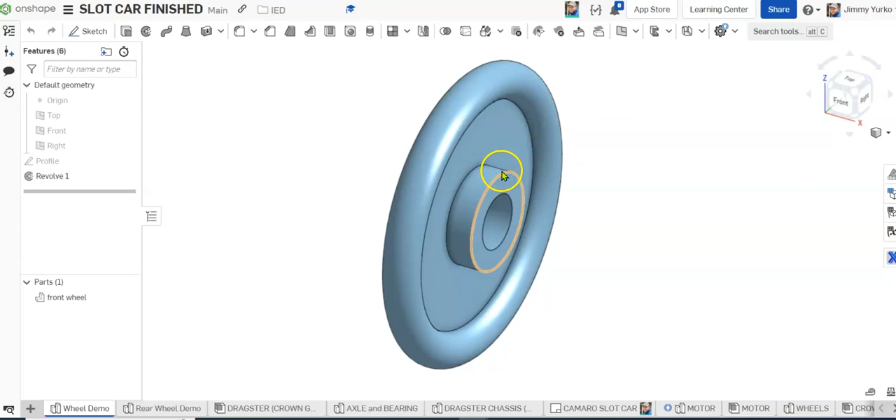Well, ladies and gentlemen, today we're going to go ahead and make this wheel for the slot car project. The drawings provided show you the details needed to create this wheel.

When you take a look at this, the first thing we're going to notice is that it is round. When you are creating round objects, they can be revolved. So this is going to actually be a revolved profile.

You typically would look at this and see these diameters and think, oh, I can extrude those. In reality, the quickest and easiest way to make this is the same way you would make it on a lathe, and that is to cut a profile and sweep it around an axis.

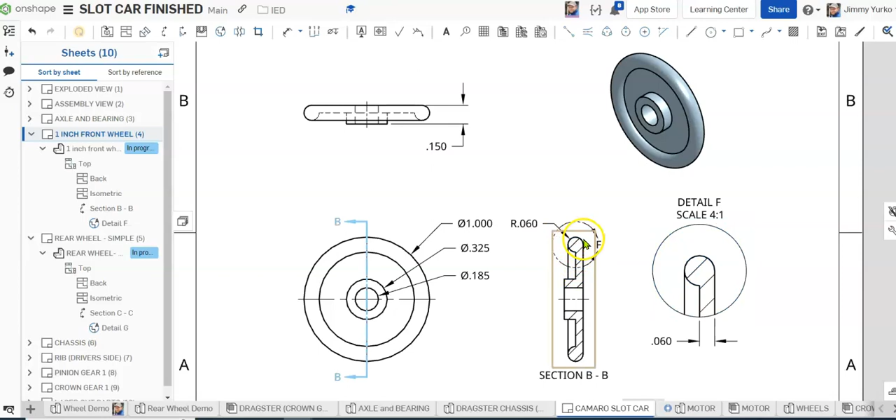So this center line is going to serve as our axis that we're going to revolve around, and this crosshatch shaded area right here will be the profile that we're actually going to draw.

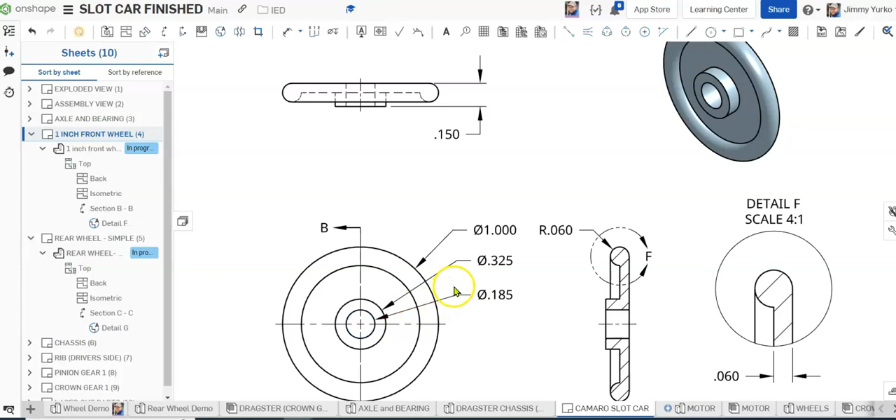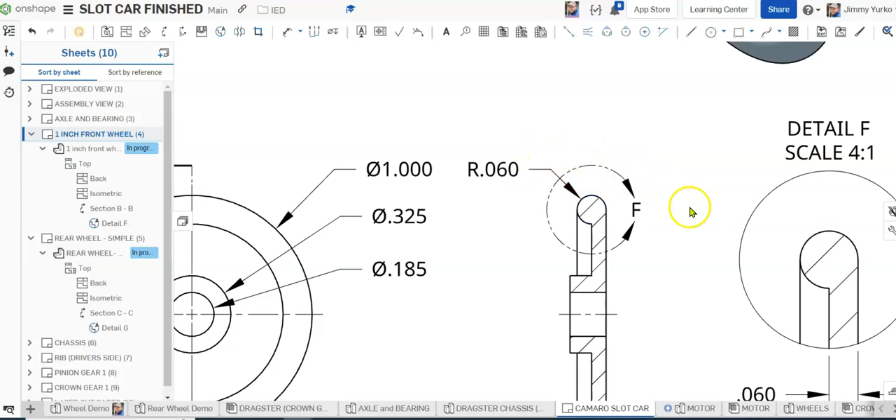A couple important details: you notice our dimensions are provided as the diameters for the object. But of course, when we draw this, we're going to be drawing half. So we're going to need to divide all these measurements by 2 for the diameters, because we'll be needing radii. The radius for the fillet for this circle is provided, so we don't need to do any math there. And the thickness for the back of the wheel is provided here in the detail view.

So looking at our drawings, just a quick review: here's the finished product isometrically, here's what it would look like when you're looking at it straight on from the side or front view, here's what you would see when looking at it from above, and this is a cutaway section view.

So you can see that when I hover over this, the line B to B, with the arrows on the left-hand side, is highlighted. That's the B line with the 2 arrowheads, and that is a cutting plane. So if we were to slice it along there and then stand here looking to our left, this is what we would see. All right, let's roll it over to the Part Studio, and this is the part we're going to make.

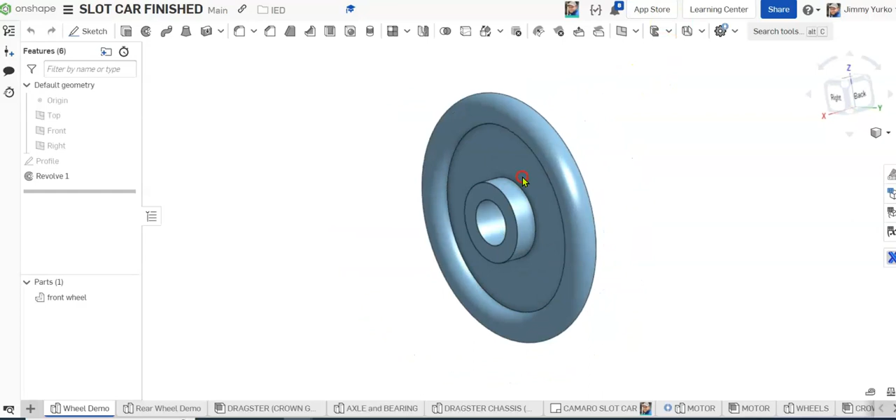Going into our profile, this is what we're going to finish with when we're all said and done. So for this demo, I will just draw another one right next to it.

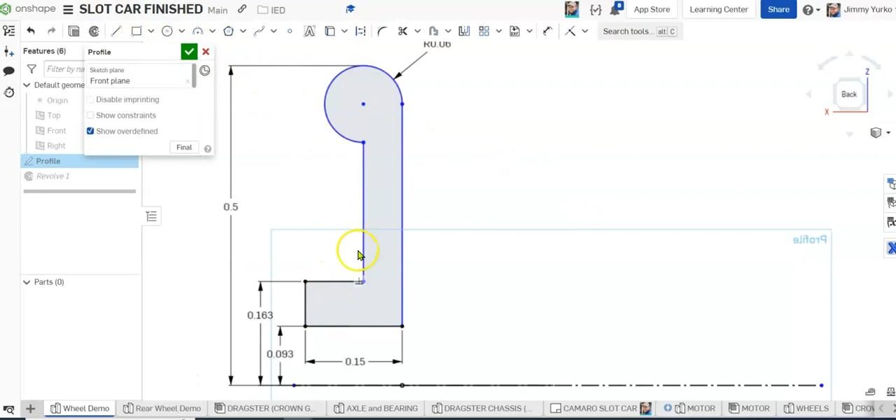First thing we're going to notice is that there are all lines and a tangent arc. This is an arc that runs tangent to this line right here, and then comes around about 3/4 of the way and stops. That knowledge tells me that I can do this entire sketch with just the line tool.

I'm going to come over here. I already have a line to serve as the revolve axis, so you'll want to start off by creating this line through the origin. If you want to, you can make it a construction line by selecting it and tapping the letter Q on the keyboard. That'll make it a dashed construction line.

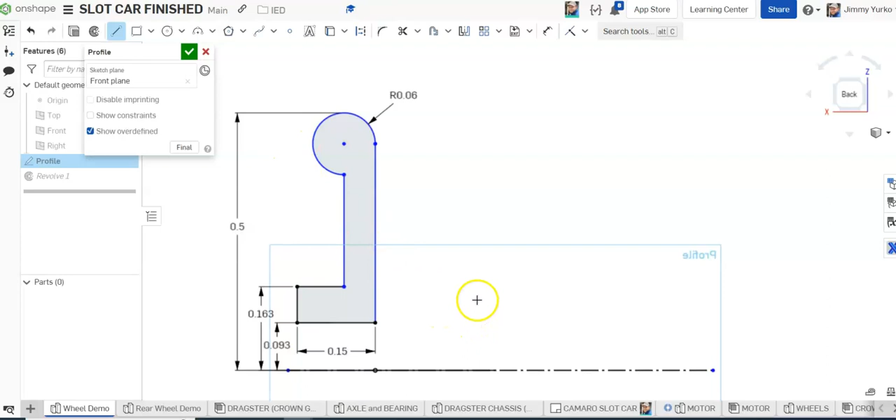To draw this sketch, we'll go ahead and start right here and draw it down and across, making a horizontal line, and then down making a vertical line, and across making a horizontal line again, and then a vertical line that goes above my original starting point. And then I want to make this arc as I show there.

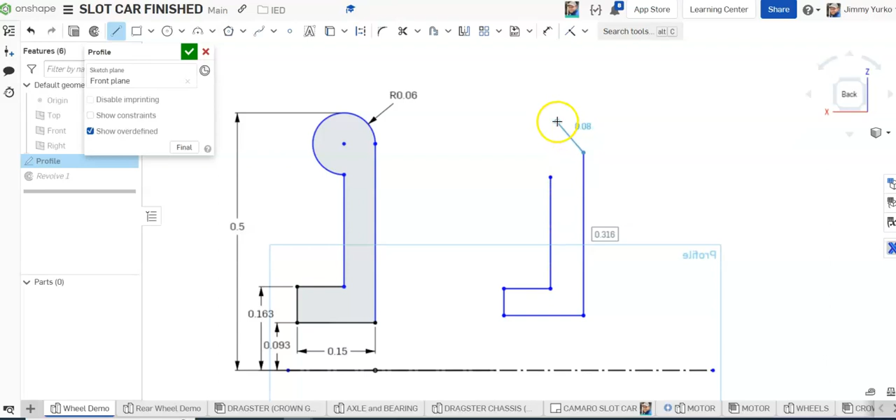Well, remember, we're in a line tool. We can't draw an arc with a line, right? Not entirely true. Bring it on back. There's one kind of arc I can make, and that is a tangent arc. So I'm just going to bring that around. To switch between the line tool and the tangent arc tool, just bring your mouse back to the end point of the line that you just created, and the tool will switch. If it doesn't happen right away, just go back and forth a couple times. It'll eventually get the hint, and the more often you do it, the more the software learns your habits.

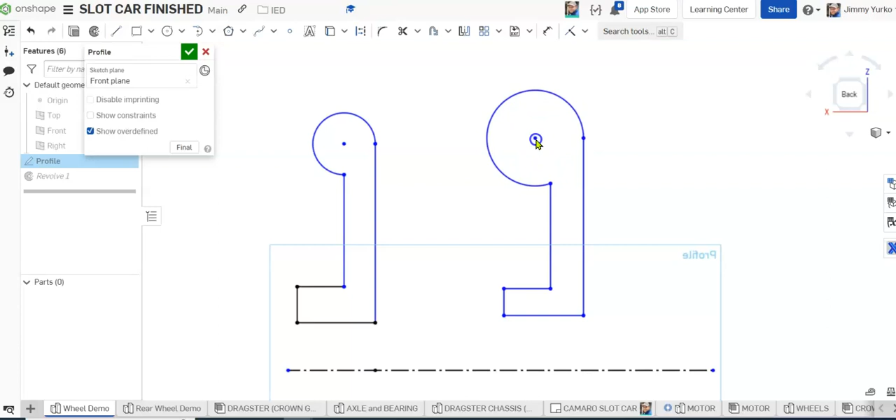And there you have it. There's my general profile. It's time to start applying some rules here.

The center point of this circle is actually vertically aligned with this inside face of the wheel. So we're going to hit the letter V on the keyboard, or select the vertical tool from our drop-down menu, and click the center point of the arc and the upper point of the inside line.

Now I have my stuff how I like it. Things are moving in ways that make sense. And it's time to go ahead and apply our dimensions.

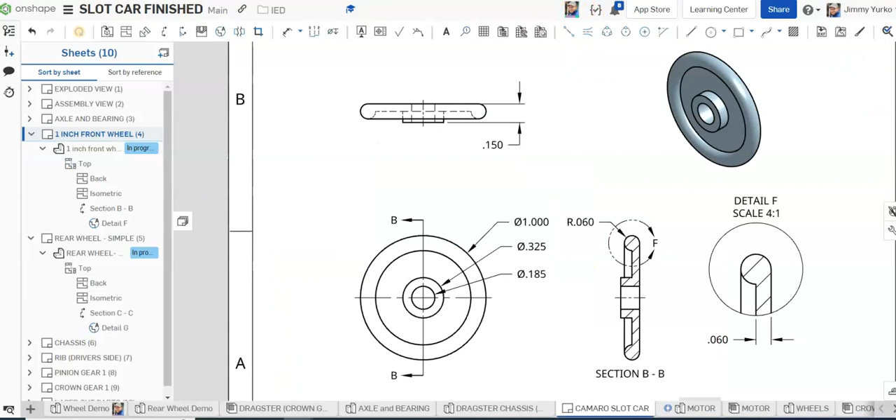Looking back at our drawing, our overall dimension, the largest dimension on the page, was 1 inch. So that's a 1 inch diameter, the distance from one edge of the circle all the way to the other. Half of that will be half an inch. Go ahead and apply a dimension. Tap D on the keyboard or click the double-headed arrow.

Dimension tool up top. Right click on that horizontal line we started the drawing off with, and then come up to the top of our arc and click and release. Move the mouse over. That was a 1 inch diameter. Of course, we're dividing this by 2 to get our radii. There you have it.

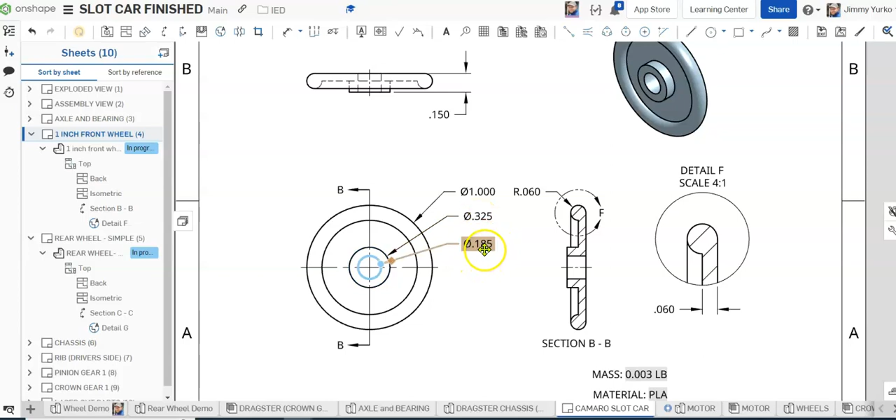Next dimension, the center hole is 185 thousandths. So let's go ahead with that one. From the center line up to the edge of the hole, 185 thousandths, so decimal point 185. And again, we're given diameter and we need radius, so just divide it by 2.

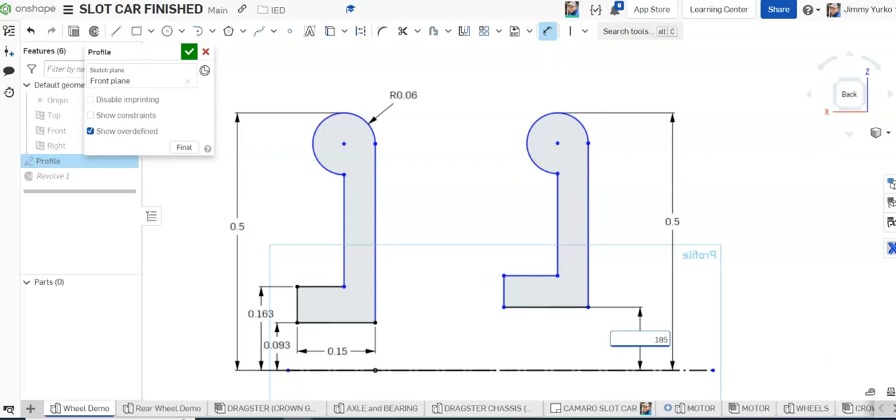And what else are we given? We're given the diameter for this wheel hub, the outer face of that wheel hub, at 325 thousandths. So center point to the side face of the wheel hub, decimal point 325 thousandths. And again, we're given a diameter, we need a radius, so divide by 2.

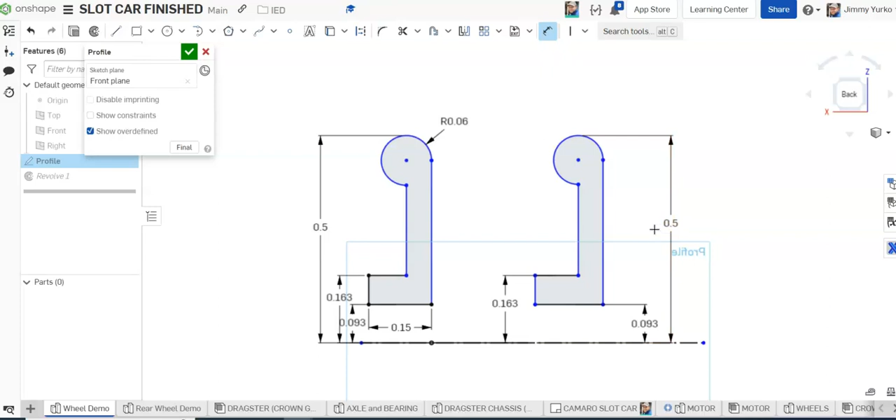Okay, so that moves around that way. I'll pull this over so it lines up with my endpoint. If you begin yours above the origin, your parts will stick and you won't be able to move. So I'll actually apply a fixed constraint just to stop this from moving right there. Okay, so that is a good shape.

Oh, look at that. There's something that needs to be dimensioned, and here's something that needs to be dimensioned. What are they? Go back to the drawing. Let's see, not provided in the front view. Radius 0.060. Let's go ahead and apply that.

Remember, the shortcut for dimension is D on the keyboard. I recommend keeping your left hand on the keyboard and your right hand on your mouse. When you're doing these drawings, it is way faster than constantly using your mouse and not using your left hand.

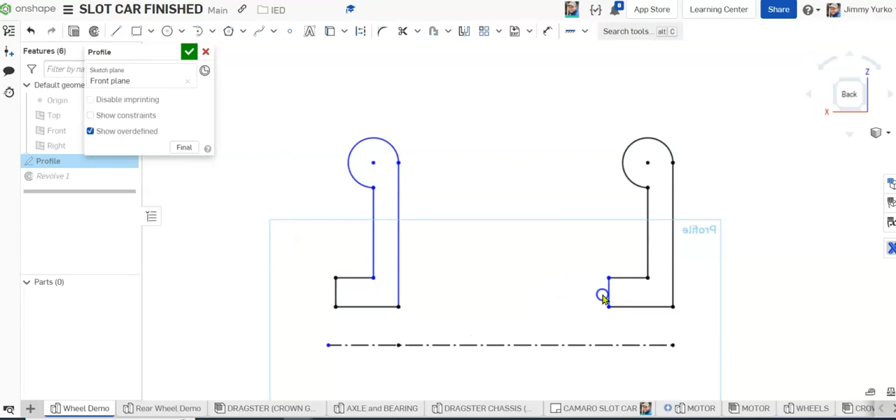All right, so that 0.060 locks everything on the right side of the drawing. Last thing is to move, stop this from moving and apply a dimension to that.

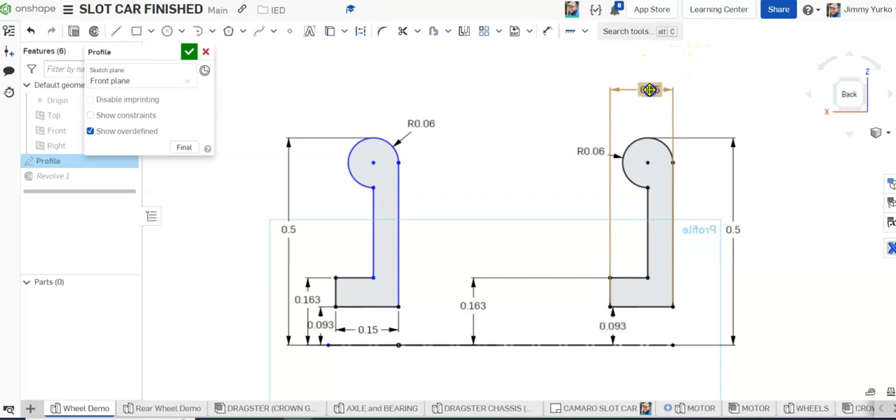Not provided in the section view, not provided in the detail view, not provided in the front view. Oh, there it is, the overall thickness, 150 thousandths. So dimension the length of this line, the overall thickness, 150 thousandths. And that's not divided or multiplied because this is the actual size as it shows here. So that is a depth, not a radius, so we don't have to divide that. So there you have it, there's 150 thousandths. And I'm going to finish that out.

I'm going to turn my sketch back on so you can see what I created. You see that's the same as the first one. Here's the example.

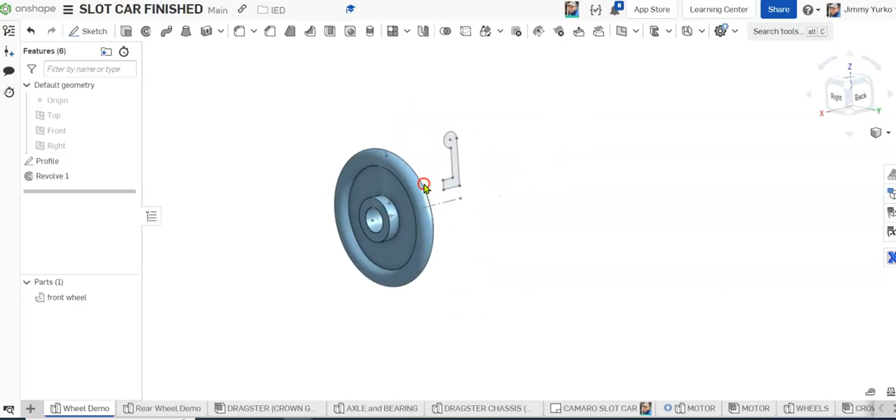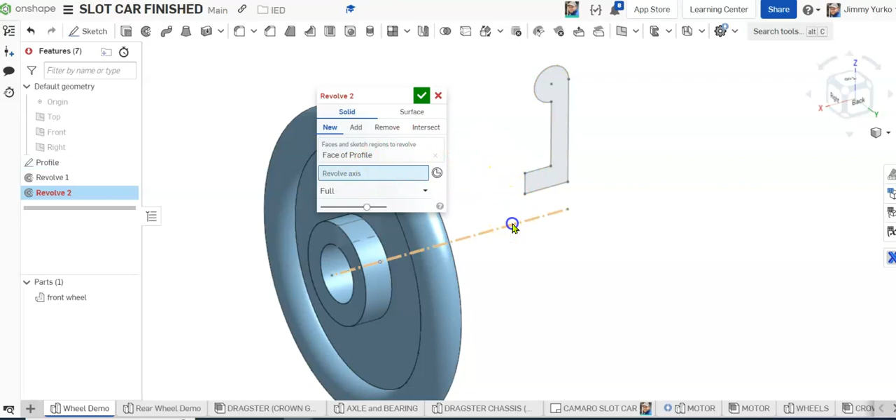To turn that into a wheel, the Revolve tool is next. I click the Revolve button. The dialog box pops up and it asks us for the faces and sketch regions to revolve. Oh, there's your face. Now it's turning red and telling me we're looking for the revolve axis, so we'll click on the revolve axis, and then click on that, and there you have it. There's my second part.

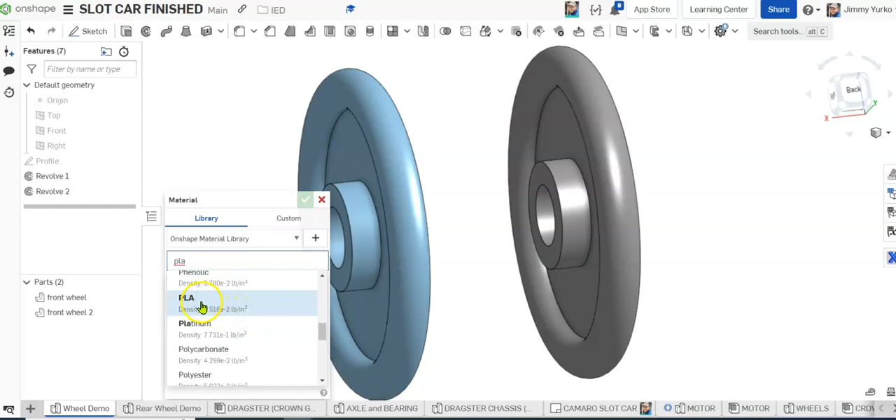Right-clicking on the name of the part that pops up down below, you can give it a name. And doing the same, right-clicking again, I can assign a material. We're going to be printing these out of PLA plastic, so just type in PLA, and search through the menu until I find PLA. There's PLA. Green check. And it's saved and correct.

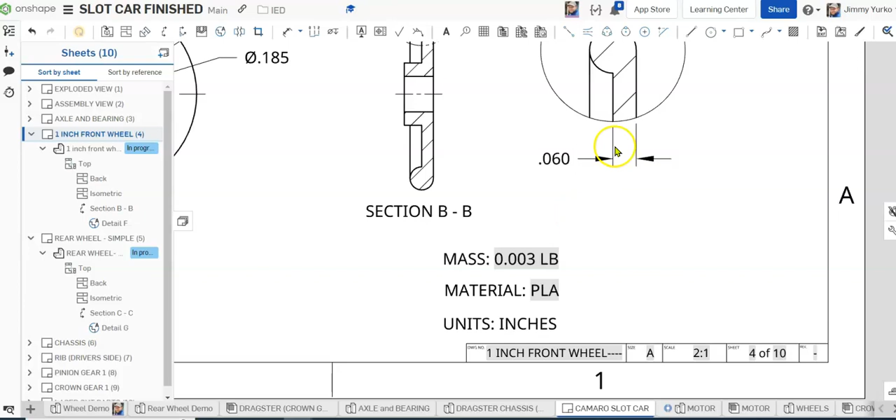Now, my drawing provided some information to help us check to see if we got it right. It says the mass is 3 thousandths of a pound. Material PLA, units are inches, so let's check the mass. In the lower right corner of the screen, you see a little scale, so it says display mass properties. Click on that display mass properties button. Click on the wheel, and you can see that the mass is 3 thousandths of a pound. So we got it right.